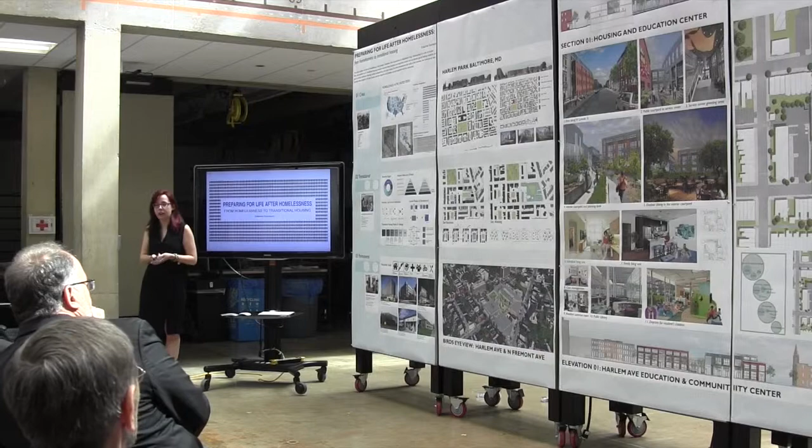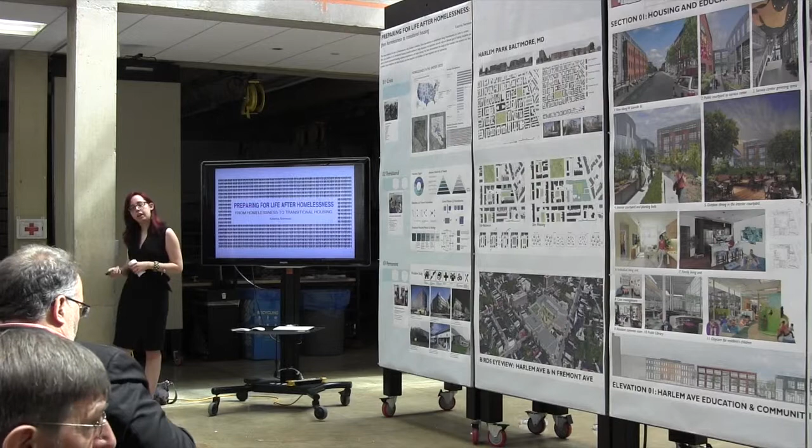This thesis is titled, Preparing for Life After Homelessness: Homelessness to Transitional Housing. This thesis explores a state of homelessness that provides a transition from homelessness to independent living. Homelessness is a state to recover from. It's not a problem that we're looking to fix. The goal of this project is to demonstrate the needs of the homeless, how services are best provided, how they can be best sited, and how best we can integrate programs and facilities with not only the needs of homeless people, but with the surrounding community.

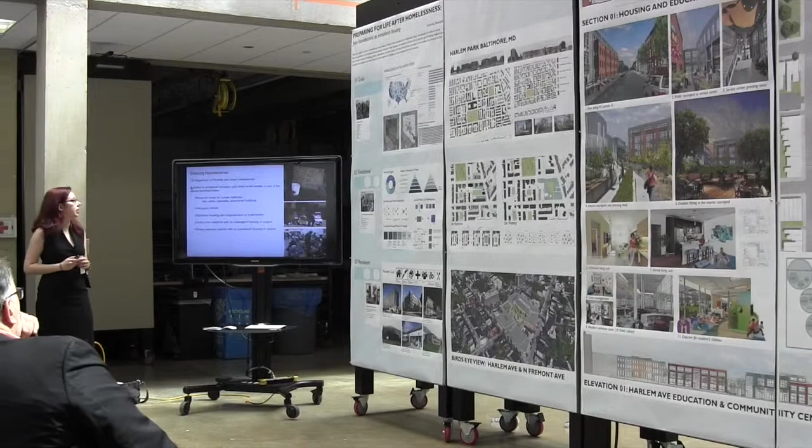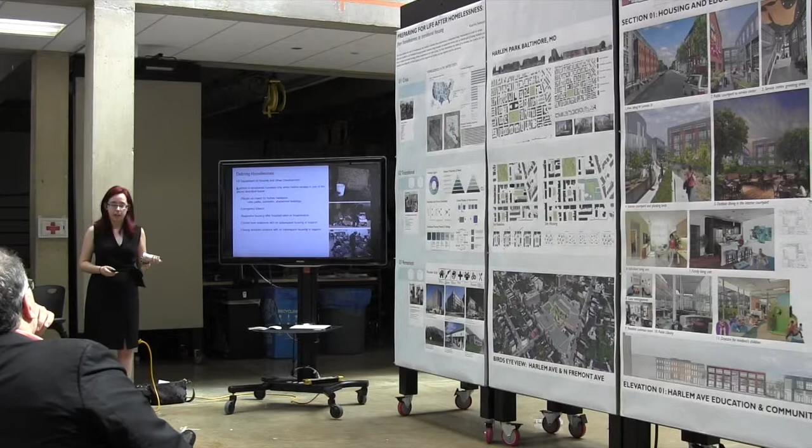Today, the U.S. Department of Housing and Urban Development defines homelessness as when a person resides in a place not meant for human habitation, emergency shelters, supportive housing after incarceration or hospitalization, someone who has been evicted with no subsequent support, or someone who's fleeing domestic violence and again has no subsequent support. Today in the United States, there are over 600,000 homeless people. Of those people, only 200,000 are receiving supportive housing. They are broken up into individuals, homeless families, unaccompanied youth, and veterans without housing.

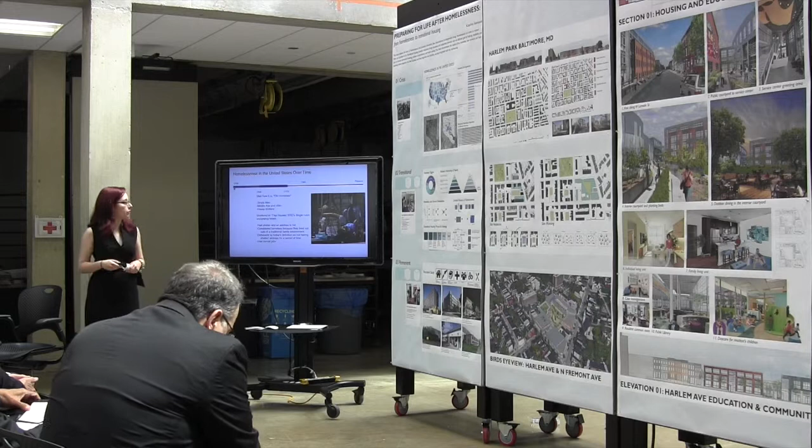Over the years, our view of homelessness has changed. In the 1930s, we began with what we labeled the Depression homeless - single men, people who were evicted, due to a lack of work and economy. At this point we had the romanticized wanderer. From the 40s to the 70s, we had the Skid Row era of the old homeless. We still had a number of single men without work, who lacked a home. They lived in flophouses, SROs, single-room occupancies. Starting in the 1980s with the Reagan era and continuing today, we have what is considered the new homeless. Starting with the shutdown of mental institutions and other supportive facilities, we suddenly had women, children, and minorities who were becoming homeless.

So what causes homelessness today can be considered loss of job, loss of employment, financial instability, violence, prison sentences, disabilities. We even have environmental disasters. And so when we lose our homes, we lose our community, we lose our stability, safety, and our ability to be financially stable. So today we have emergency shelters, transitional housing, and supportive housing for our homeless. We do have a series of programs in place. Transitional housing looks at programs of living arrangements combined with social services.

I came to this project because I myself was homeless. Between my junior and senior year of college here at the University of Maryland, my family and I, one summer, were fleeing domestic abuse. We packed up the dog, we packed up what we could in the bags we could carry. We lived in a hotel for a month. We moved from room to room. We took turns deciding who slept on the sofa, who slept on the bed, and who slept on the floor on couch cushions. And we started with a set amount of money.

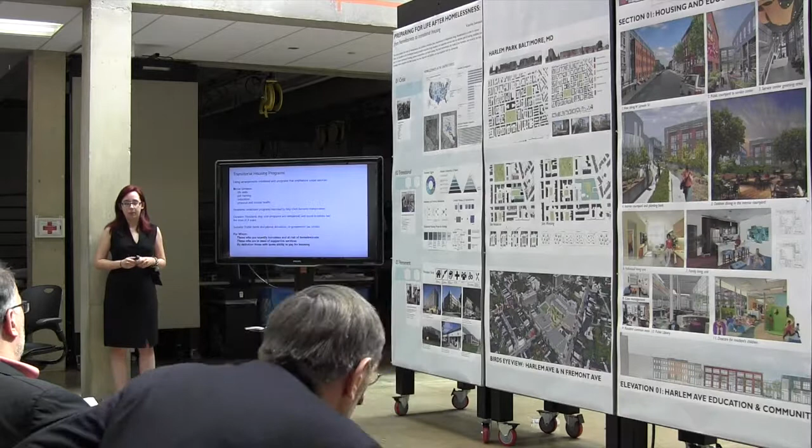We had enough to support ourselves for a while. But as the money began to run out, our crisis became worse. We were afraid we were going to end up in emergency shelters. We were afraid we were going to be split up. And so I remember the entire time, why wasn't there someplace we could go to get help? Why couldn't someone tell us what the best move was or where to find housing? Sure, we had a lawyer, but we didn't have the rest of the aid we needed.

And so that was how I came to this research, approaching the concept of homelessness to transitional housing. Today, transitional housing programs usually last anywhere from a few months to 2 years, in which incoming members spend 1 to 4 months going through a stabilization process. There's a moment where stabilization and education occurs, programs are met, and then there's program completion and aid in finding permanent housing. So my question for transitional housing was, how does it deal with the loss of home and creating a place where needs are met?

These needs, if we look at Maslow's hierarchy of needs, include physical and biological needs, safety, love and belonging, esteem, and self-actualization. The homeless may at most achieve physical and biological needs.

There's a little bit of safety, there's some food. However, it is only through housing that we have the chance to achieve safety and the rest of our emotional and psychological needs. So then what is home? Home is created by place, is created by memories, is created by the objects that hold those memories and the people we make those memories with. And so transitional housing, as you'll see in my project, focuses on how we can combine housing, services, community, and transition in a place and a space that we create.

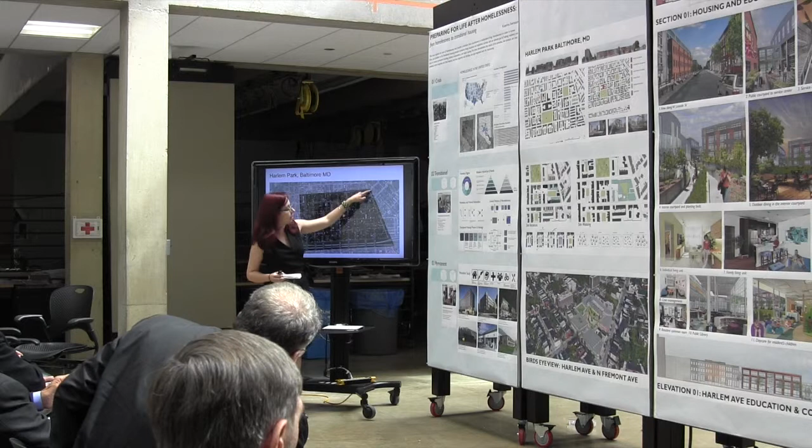So I began by looking at which neighborhoods had the highest homeless populations, and I came to the neighborhood of Harlem Park. Harlem Park is located right up above Route 40. For context, the Sandtown Winchester riots are located right in the neighborhood above. In fact, the caravan that was carrying Freddie Gray stopped at this corner, right here between the neighborhood of Upton, Sandtown Winchester, and Harlem Park.

Harlem Park is an interesting neighborhood because it can be compared to the way people become homeless on their own. This is a neighborhood that has seen flight, disinvestment, and crisis. It has also seen aid brought to it in the form of the Harlem Park Demonstration Project, where, in an attempt to create better community, the inner alleys were demolished of their alley houses, and instead public parks were put in. Currently, 40 to 50% of residents 16 to 64 are not working.

We have up to a 30% vacancy of homes on the site. In talking with the community and researching, a lot of what I heard was that they needed amenities, they needed help, they needed a place, and they needed work so they could get their young men off the street and get them employed, giving them the education they deserve.

So Harlem Park has existing communities. There are a number of schools, and a strong community of churches and congregations. We have public spaces, multifamily and some subsidized housing, and we also have the community of parks. The intervention site is located right here, by Fremont Avenue, Harlem Avenue, and West Lombard Street.

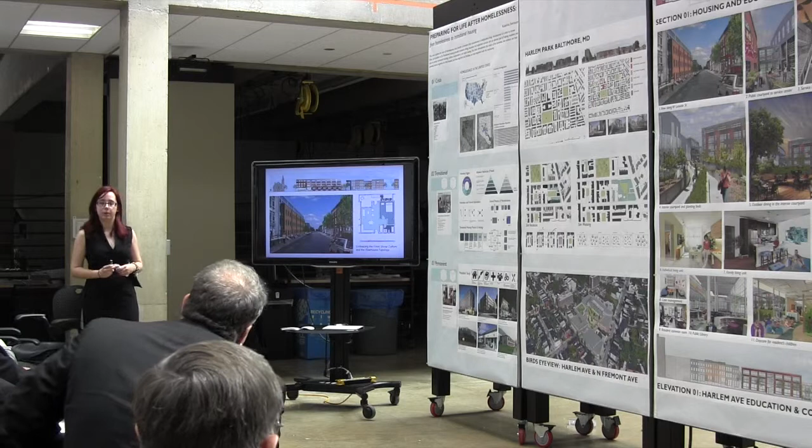One thing that was important in looking at how some of the units were created was the Baltimore culture of the front stoop, and looking at the concept of these courtyard parks as well. Interaction in Baltimore happens from front door to front door.

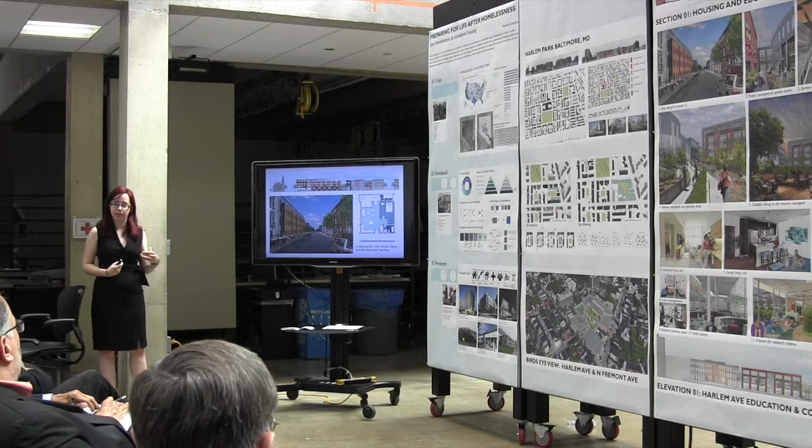For residents who are most acclimated and furthest along in transitioning, or perhaps most comfortable with integrating back into society, their units face onto existing residences, creating that bit of interaction with the existing community.

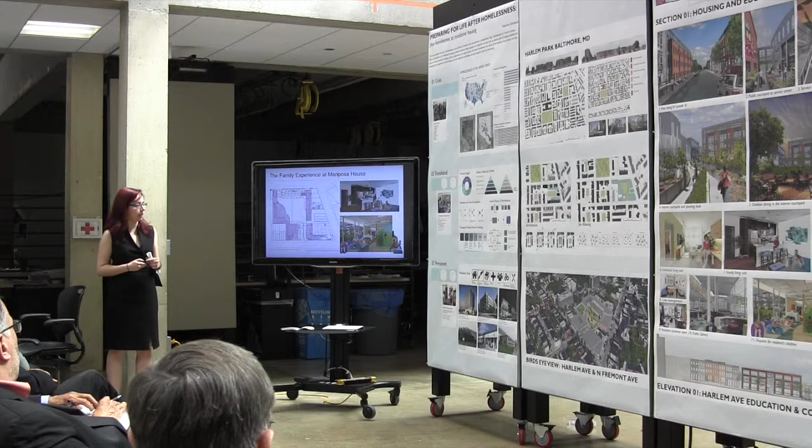There's also, in making this space seem less institutional, an incorporation of the row house typology. The family will make use of the daycare services and the library, and they have larger units. You can see a number of the four different grouping units: we have the single unit, a double unit, family units, and group units.

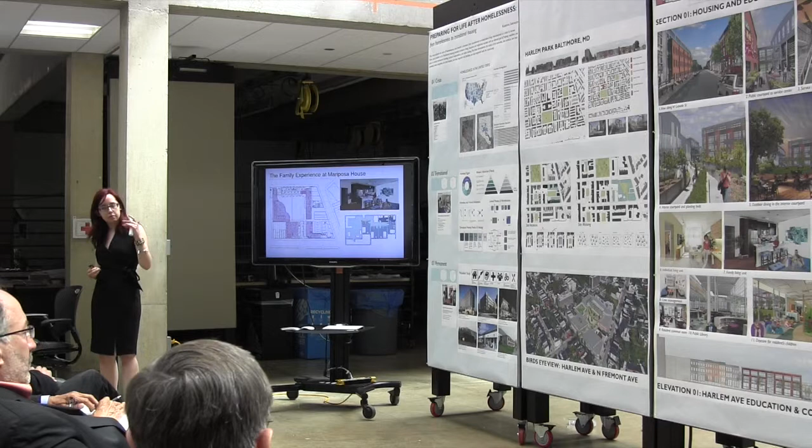And so then we have how the outside community approaches this site. They have access as well to the health center and social services, and access to the educational facility. Most residents of Harlem Park have a high school education at most, so this is a chance for them to get more opportunities.

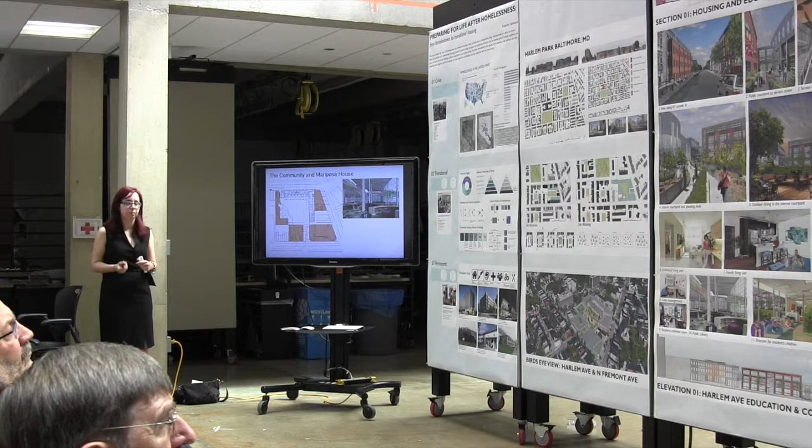However, one thing that is important was the design of the courtyard. The residents of the neighborhood have access to public courtyards, while the interior courtyard is exclusive to residents. They can invite other members in, but it was important to create a defensible space and to create a space where we had fronts and we could interact.

And so I'd like to conclude with, once again, the goals of this project. This thesis was looking at how we integrate communities, how we can best bring aid to areas that are in need. How do we plant a seed? By investing in people and in community, we can perhaps better the environment. And at this point, I'd like to open to comments.

Actually, I have a question. Certainly. So I've been attracted to this thesis from thesis match. It's a really amazing topic.

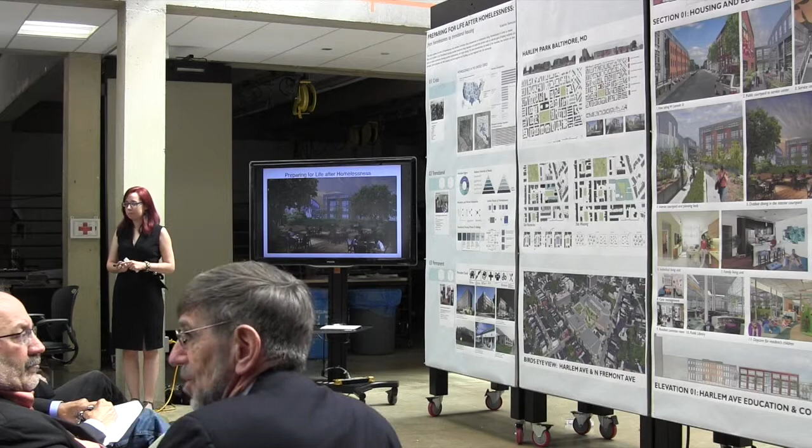First question is, during your research, did you interact with people in Baltimore, neighborhood representatives, officials, and so forth, who are dealing with the problem of homelessness? And the second thing that intrigued me was your reference to the Gabion wall. Yes, so those two questions.

Okay, certainly. So I spoke a little bit with certain community members in doing research. I also spoke with a number of the community development centers located in the area. I think there was the Northeast, and then I spoke with... I can't remember the group, but I did speak with a number of officials about what were the interventions happening near this site as well as in other places of the city.

And so in some of those cases, what was being done was that there were small investments of where did they see opportunities, bringing in work, whether it was buildings for commercial, whether it was new housing, and so how they could reinvest.

And so in terms of, to answer your question about the Gabion wall, in thinking about this idea of transition and this very liminal state of not being in one community or another, there's this idea of how we could represent that in architecture. And for me, that seemed to be a Gabion wall. So this creation where we have this rubble, these rocks from the site, from the buildings that existed, this idea of an old life - we can see through it, there's light shining through.

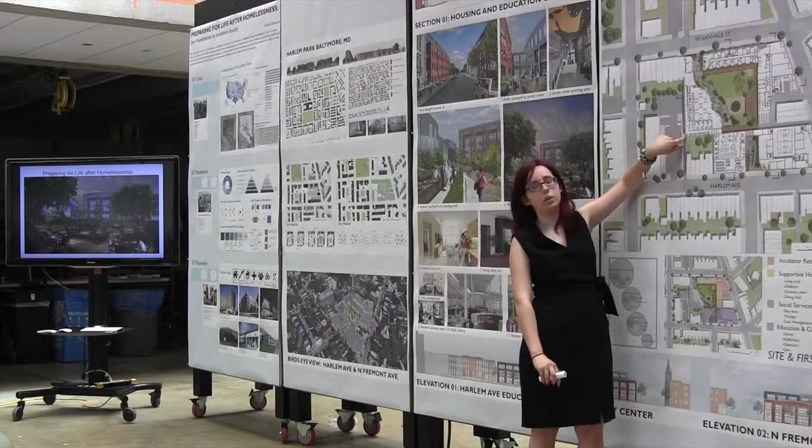So as we move through the building and we move through - so to show on plan, the Gabion wall occurs the length of the social services housing, and there's a moment of passing through the Gabion wall, past the entrance.

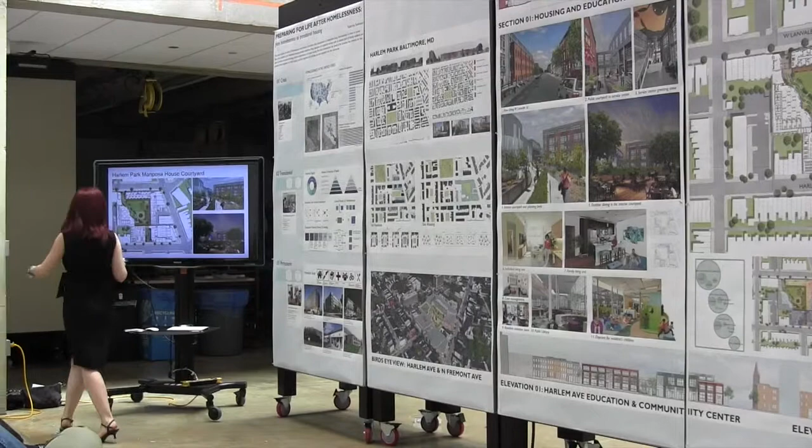And so, Irene, you had a perspective of it, didn't you? Yes, I do. So the Gabion wall can in part be seen here beyond this wall, and then it can also be seen here. Let me go to this - more detail. Yes, so here we can start to see the Gabion wall.

How many families, how many units are there? There are 75 units available, and the population would be at peak 200. 200 people? And the general overall square footage of everything but the housing, do you know offhand?

I do know the basic dimensions of the site - I don't have the program square footage. I mean, so for example, the library is about how big? Oh, the library is about 10,000 square feet. And it looks like the social services center is a little bit larger.

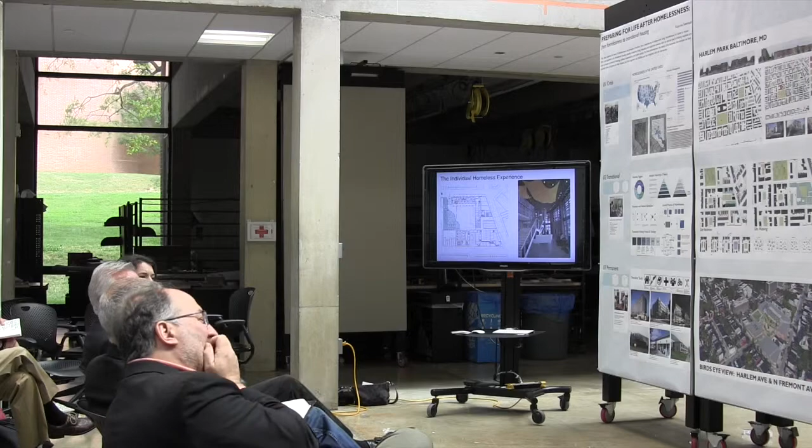Correct. And then the school, I guess the education center, could you just say what's in there? What are all those program pieces? There's a gymnasium, I can see that. Certainly, what's everything else there? So what we have is we have the gymnasium, we have a library, we have the auditorium, we have a number of small workspaces and classrooms. We have a large community room for workspace. We have computer labs, and we have other study rooms.

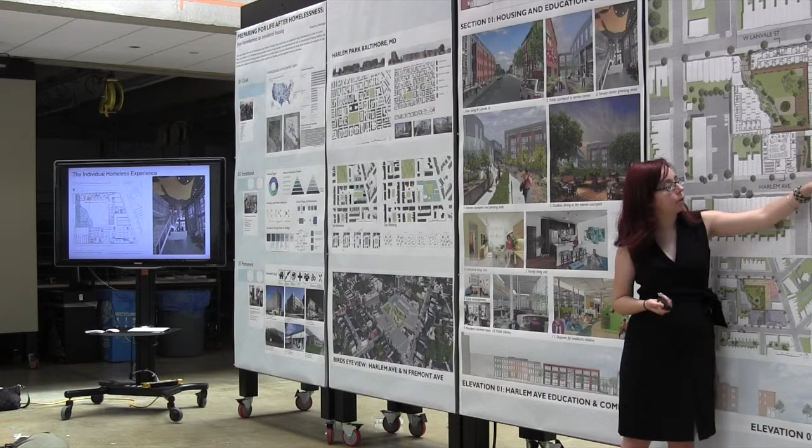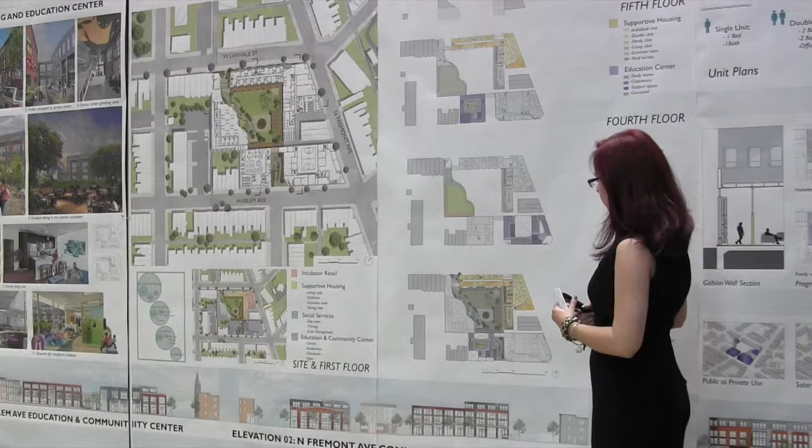We have a series of workshops, and then moving to the upper layers, we have, of course, the gym. We have some gym spaces, and then up above we have areas for workout, for classes to be held. And so the community can choose to use these spaces and say, well, I want to set up maybe a yoga class. And what is that long bar just north of the purple stuff there?

Certainly. Yeah, what is that? Okay, so this is a roof terrace that stands above a common room, the daycare, and the dining hall.

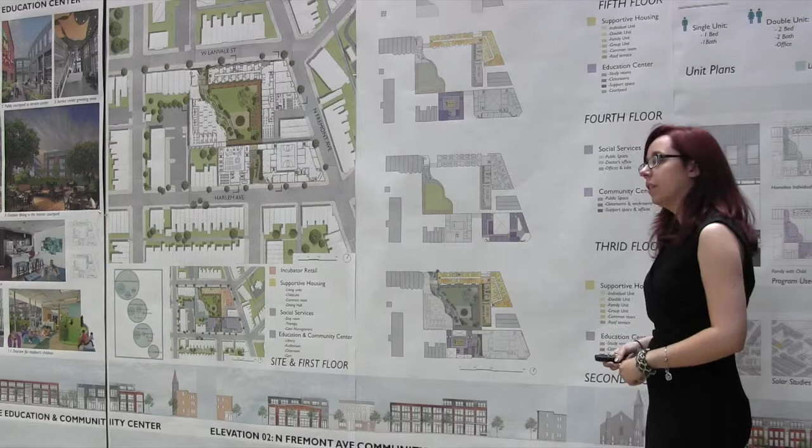Will you repeat how many units? 75. And do these - is it your thought that they come and they stay for, is there a period, is there a limit to how much time they can spend there? And how does that work? There is a limit of 2 years that residents can stay on site.

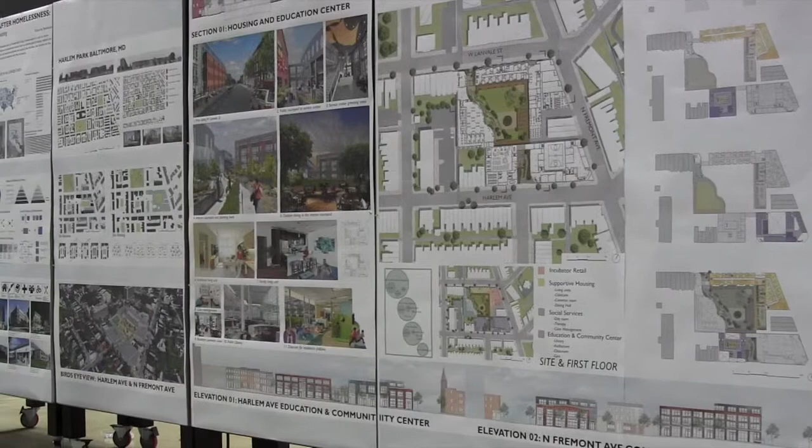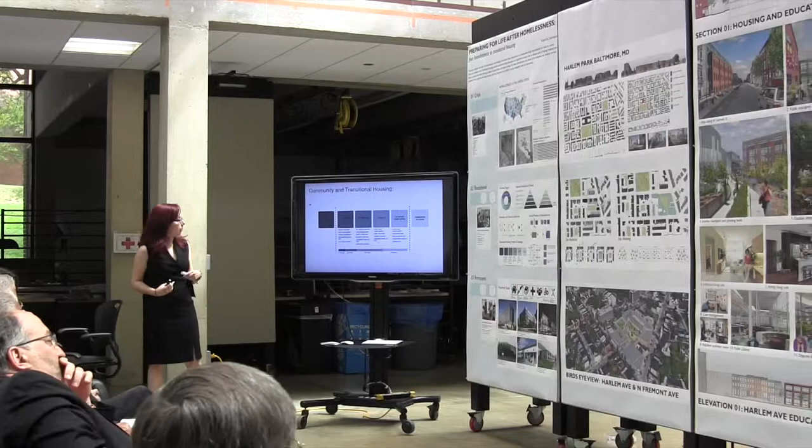Looking at this period of time, for the first 2 to 4 months, residents come in, their situations are assessed, and they are given a housing unit. From 4 months on, residents go through case management and are given a program based on their needs, whether that's working towards a GED or taking classes on household and financial management. Residents begin the program, and their housing needs are assessed again.

Then, through a period of half a year to 1.5 years from that point on, the programs are continued. Residents are given the chance to work on site, whether in the incubator retail or the library, giving back to the overall community of residents. Towards the end, they complete the program, finishing their series of classes or coursework, and receive a certificate. Case management and their case officer then help them find permanent housing.

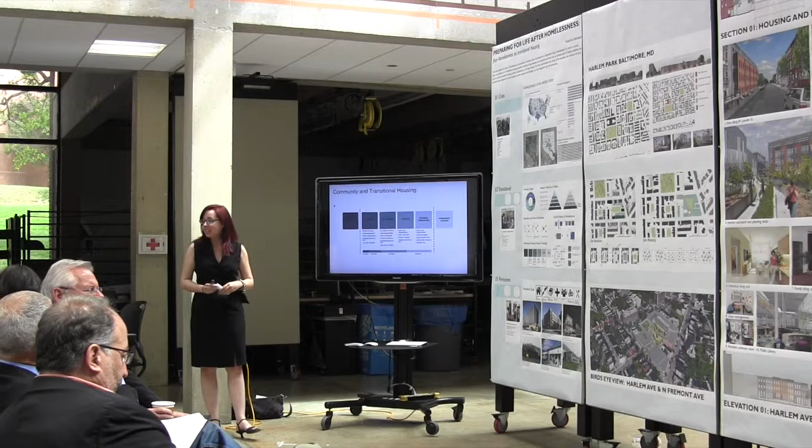Any idea how many of these Baltimore would need to deal with the homeless problem? I'm just curious, would you need 10 of these? There's 2,000 homeless people, and if these can house at most 200, we would need 10 of these. So if we could take 10 blocks at approximately 400 by 600 feet, we could house all the homeless.

But that's assuming the homeless population replenishes. If you actually start to solve the problem, when people really transition, it also depends on their want to transition. There are, of course, homeless who are happy as they are. The point of this thesis is for those who are in a position to transition, and transitional housing is for those who can't transition yet. There are, of course, those who will need permanent assistance.

For families, are the children placed in regular school? Yes. Tell me more about the education - is it for the adults there? Certainly. Ideally, I see the education being at the high school and adult level, because on-site, located within this block by Harlem Park itself, we already have a middle school, high school, elementary school, and a fine arts school in place. So there could be a classroom or two that teaches elementary or middle school level for students who are maybe too afraid, or coming from domestic abuse, who don't want their child walking those 3 blocks to school.

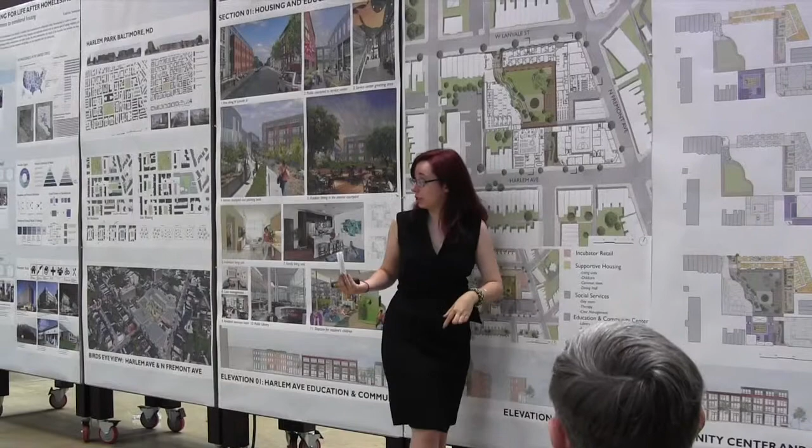But you raise a good point, because this building right here is actually a church. So one of the things I had been beginning to think about is how then does the congregation, after Sunday, come out and interact with the site? Where might they come?

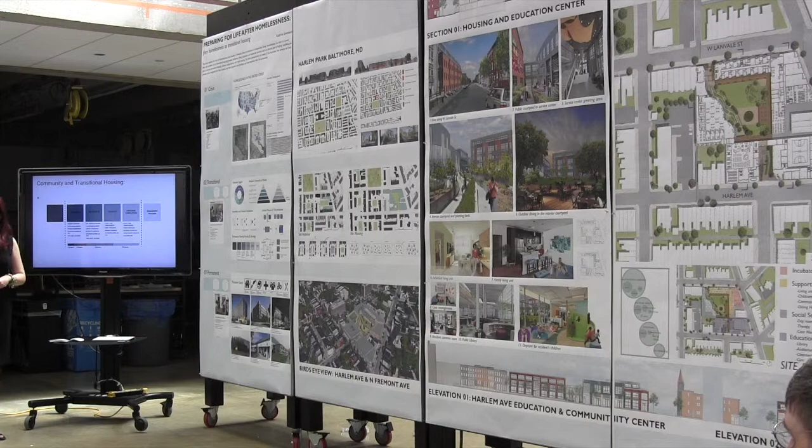There certainly could be more integrated spaces where they come together. I could certainly see the courtyard as being open to the community at certain points. However, there still needs to be that level of security. It was more in the location of those community-type spaces being on the street, so you could come right into those spaces no matter who you were.

But there were very protective areas as well, simultaneously, for those residents who were just not ready for that yet. But at least two series of transitions across the whole thing. And I would say that's what I was starting and trying to do.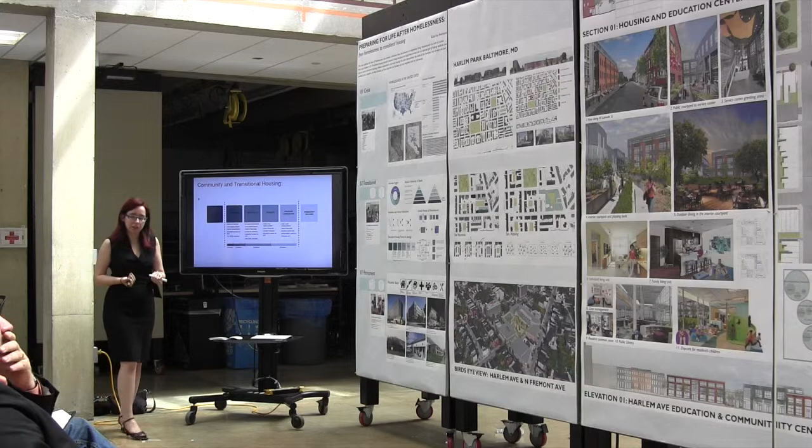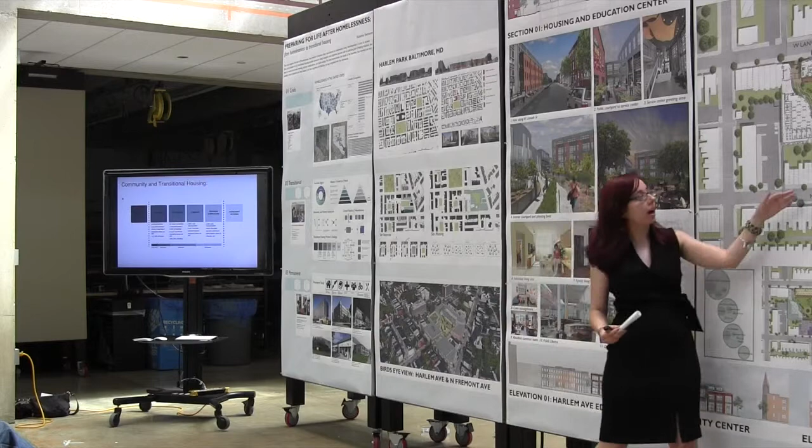It probably needs another level of development, but the most public use of the space happens alongside the main roads, so residential members can come in from the courtyard, and then the community comes in, and then these buildings line the street.

So the larger courtyard is really just for the residents? True, yes. Except on special days, right? I could see, on the 4th of July, people coming in.

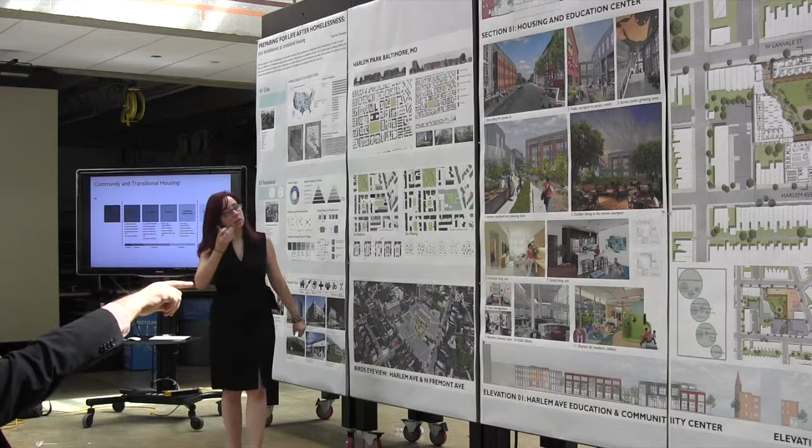But the big room with the curvy wall on the outside? Yes, that's the day room, where people hang out, or homeless can hang out during the day. Correct.

One thing you need is a foundation to buy up those houses that were abandoned and make them part of your thing, so there's a transition from being in there to being out, and that would diffuse it out into the neighborhood.

I think I wanted to congratulate you on taking on such a big item, and I mean, for not just Baltimore, any city. I congratulate you on trying to look at the project in a way that deinstitutionalizes the total attempt of what you're trying to put together.

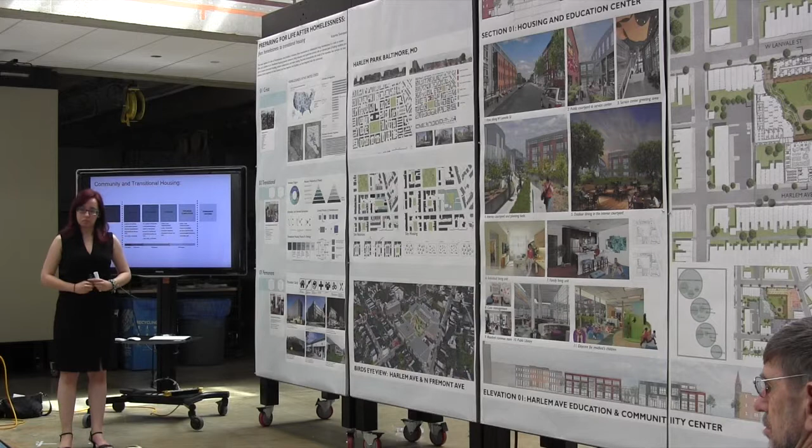I think the elevations begin to suggest an attitude about how it fits into the streetscape. But I keep looking at the court and keep asking myself about the different scales and the issues of privacy for people who are used to living in all communities.

How do they transition to living in a multi-level environment, four levels with big glass walls? And how does privacy relate to that whole transition period for them?

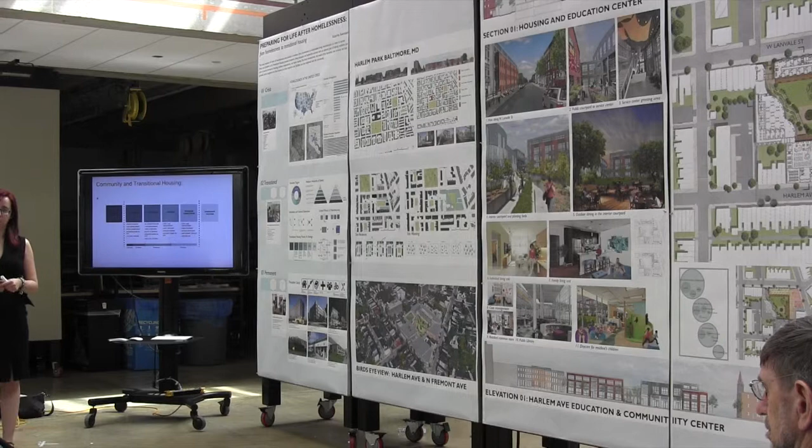I didn't mean to keep doing it, but my eyes keep going to the big pieces of glass windows on many of the buildings, and I look next door to people who own properties, and there's a level of privacy that's implied by the size of the windows, by the communal spaces.

And I wonder if, at times, this four levels of treatment with a penthouse implied on the top, whether that's the correct vernacular for a transition role for the people. So I would like for you to talk a little bit more about how you see the environment.

For instance, the courtyard versus the environment of the street. And although you talk about it for the stoops slightly, that probably represents less than a tenth of the total number of people who live in the project. The rest are dealing with stairways and elevators, and other challenges to how they've been used to living.

So I think a little bit more attention to transitions within your project, even transitions of scale, transitions of privacy, transitions of community. I find that aspect not pursued as much as others.

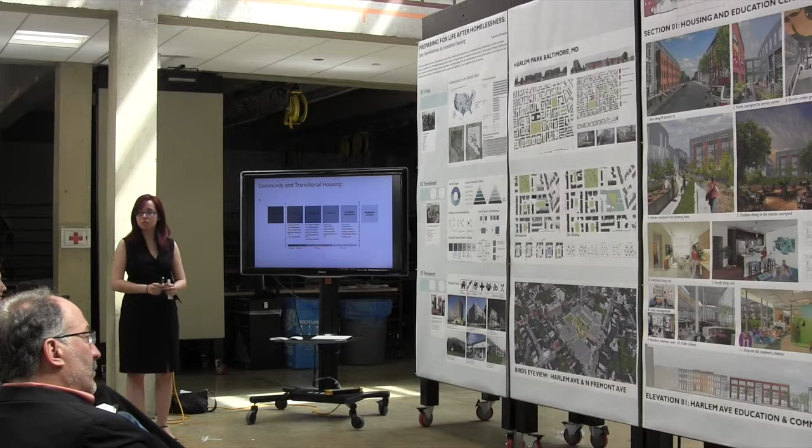It could be that that's something you need a level of diagram in your diagrammatic models to explain, because I also think this is a really thoughtful and thorough project, and I think we can all kind of pick out from your plans a reading of how you're navigating some of those transitions and different scales. I actually think it's very thoughtfully placed in the city.

And appreciate, from what I can gather, the way you were thinking about a variety of entrances, a variety of discrete programs recognizable as almost separate buildings. I do think you're offering some of that variety, but I think if you created some diagrams explaining exactly how you were thinking about it, it might illuminate a lot more.

Well, I brought it up because I think the courtyard and the choice you made about a courtyard, which is a different kind of space than a street space, how you would take advantage of that difference in the transition. But I agree about the comment about the neighboring houses. I think the next stage of this would be, okay, can you think about it not as one of ten, but how does it offer a range of options that also lead into the surrounding community?

So, for example, you might think about the scale of these incubator spaces. There's a project at Harvard, a kind of market space proposed under the bridge in Harlem, that studied what's the smallest rentable market stall that could be as cheap as possible for someone just getting started in an entrepreneurial venture. Then they moved from that very small increment up to a larger scale once the business is thriving.

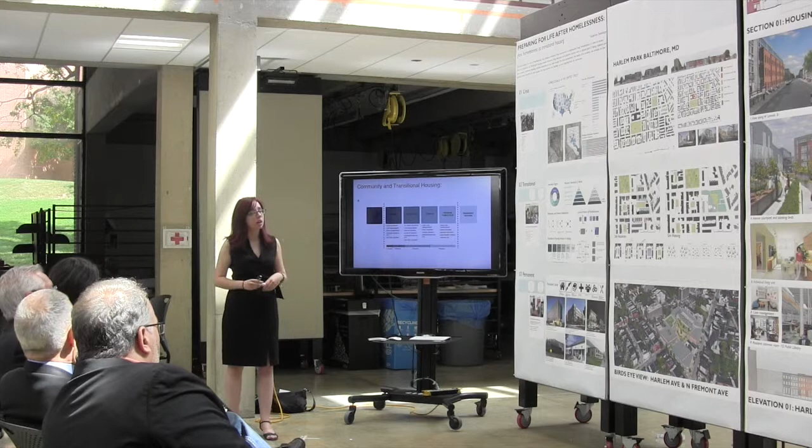Some good points are made. Yes, it's how do you make this into a residential scale, because it comes across more strongly as an institutional scale - the size of windows. I think how you've done the three-story element is the beginning of thinking about that.

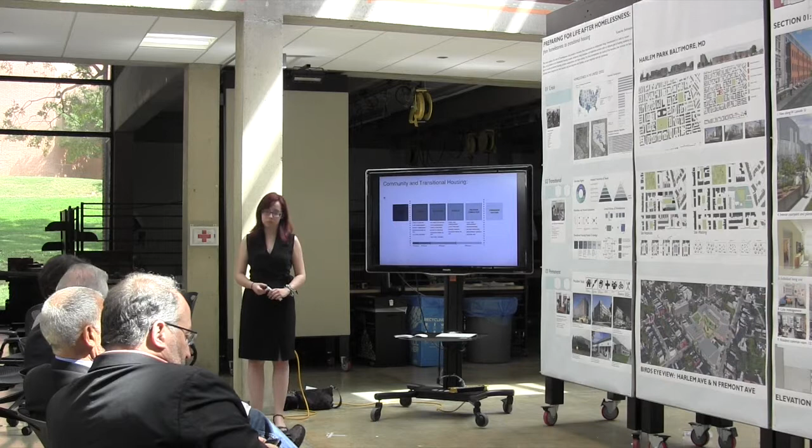But I'd like to see it scaled down quite a bit, actually, even to the point of thinking about how you can individualize the unit itself, and then how you build up that scale. How the community could also interact with the child care center and become part of that. How all of these could be carefully thought about in terms of how much community interaction versus privacy is needed.

So that whole issue of going from shock and feeling that you've lost everything, to slowly building that confidence back up, to then eventually move to opportunity.

Baltimore being a city of so many individual small houses, I would be curious to find out what you had when you're homeless - where would your first home be? Would it likely be an apartment, or would it likely be a small row home? If you could predict where they would be going, I think your architecture would take on a way of teaching them how to live in that environment.

And I wondered that the implication almost is that their future is a small room, multi-level building. That may actually be the answer - for the individual. That may not be the answer for the family.

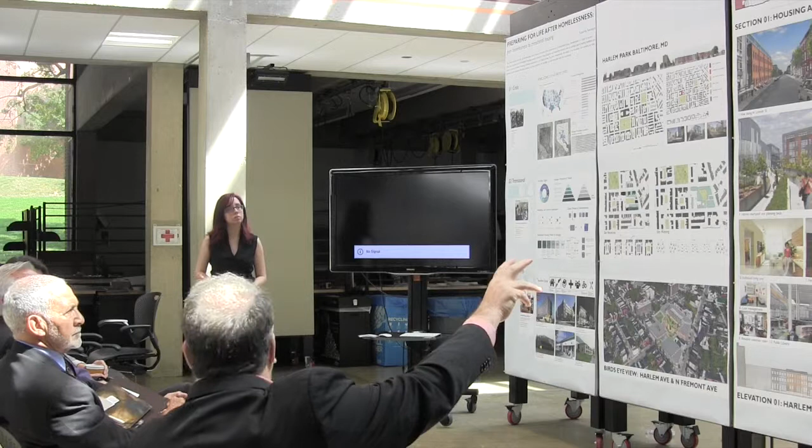I think one of the things that is the tension for me is the level of public and privateness of the courtyard there. And I wonder if you sort of continue along with Gary's point, that if you took the courtyard and said what they really need are smaller social groupings, and made courtyards appropriate to that, so 10 units around a courtyard or something like that, that would bring the scale down. I could even see a tall building like this if the social groupings were smaller. So instead of a big courtyard, which I get the sense represents this idea that at a certain point everybody comes together, and that's community. That's a very admirable thing about the way you think about architecture, because what you're trying to suggest is the architecture facilitates the right kind of social interaction for people, and I think architecture can do that.

But I guess I wonder a little bit with the double-loaded corridor and the big building, if you could just take one of the pieces out once in a while and design it -- take the library out, or take the learning center out, or the homeless piece out, and say that piece went across the street. Could you actually make a building and a complex that had these smaller groupings of courts that would allow people the sense that they could take ownership of that space and interact in a way that was perhaps less public? I think it would probably mean not including some of the program pieces that you've done, to do that exercise, because then you'd want to see how you could use that real estate to center the site and divide it up.

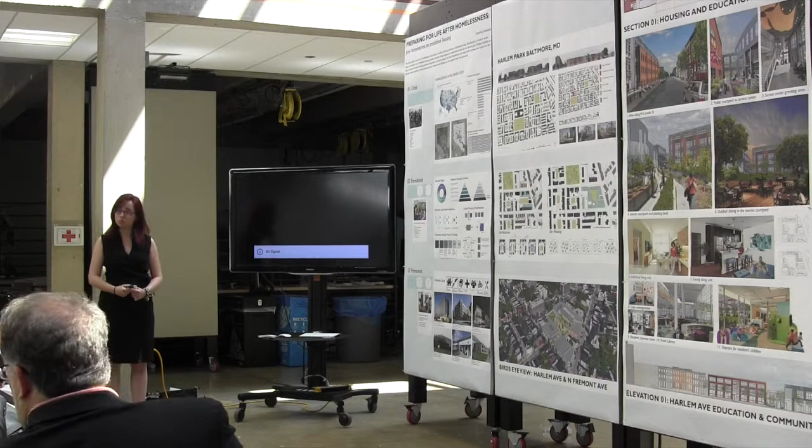I think there's, picking up a little on Matt's comments, thinking about this section as well, and how multi-levels, let's say the bottom two floors, could allow you to walk along a space comfortably, but see what's happening, rather than feeling you have to walk into that space. Think about the 3-dimensional qualities of creating privacy, yet allowing the circulation you need. Along that, you could think about what happens as your courtyard space begins to consider different levels and so on.

So it really is an environment inclusive of a lot of different things. I think this project is a project continuing on, looking at the layers, that porosity, and how you create those views, that wonder, yet at the same time knowing when you have access, or when you don't have access, and that privacy. It's a very, very comprehensive look. Thank you very much. Very, very comprehensive indeed.

For those of you who have been listening to the extremely wide range of difficult issues that were brought up in this discussion, all of which have been grappled with in one way or another, there's one other one that Professor Bell brought up just a minute ago that I want to particularly draw your attention to.